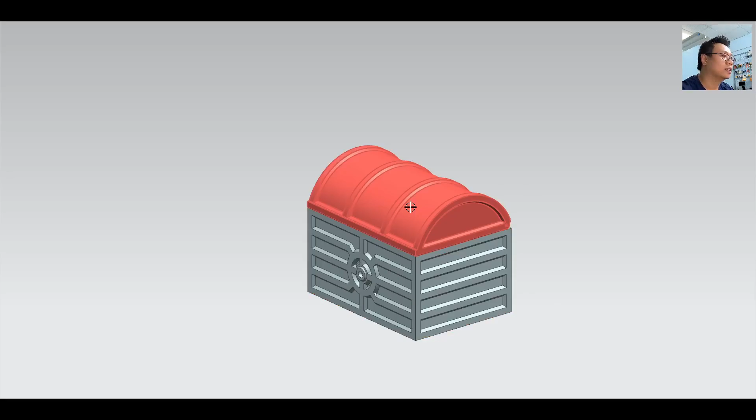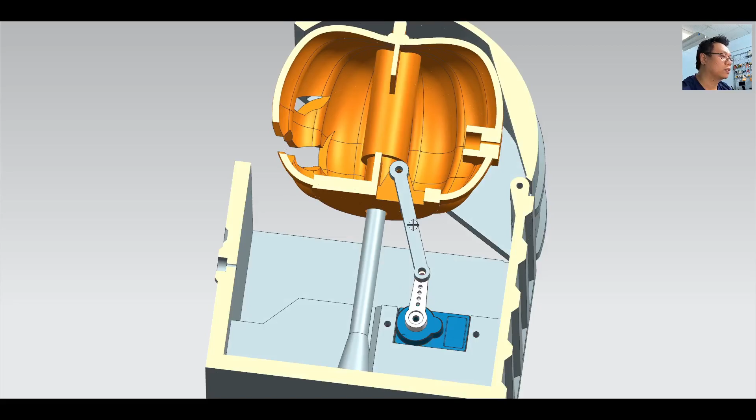Okay, first let's take some minutes to view the 3D design. This photophobia box has the body and a cover on the top. Inside the box, we have a Halloween pumpkin which will slide up and down based on the cylinder guide here, by an SG90 servo and a connecting link.

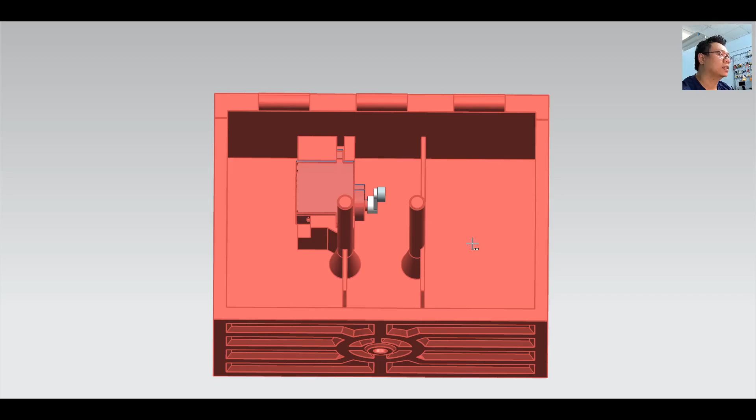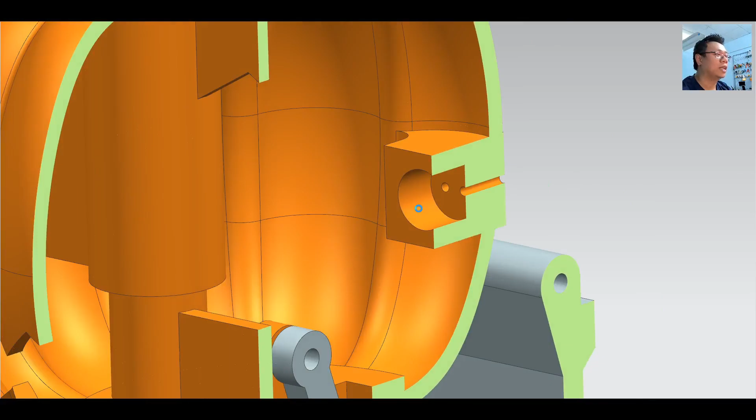Okay, inside the box we have a left pocket for Arduino, a right pocket for 2 pieces of 18650 lithium battery, and in the front of the body we have a hole to mount the photoresistor, and inside of the pumpkin, we have a hole for a 5mm LED. Okay. And here is the moving simulation. Okay, now let's bring components.

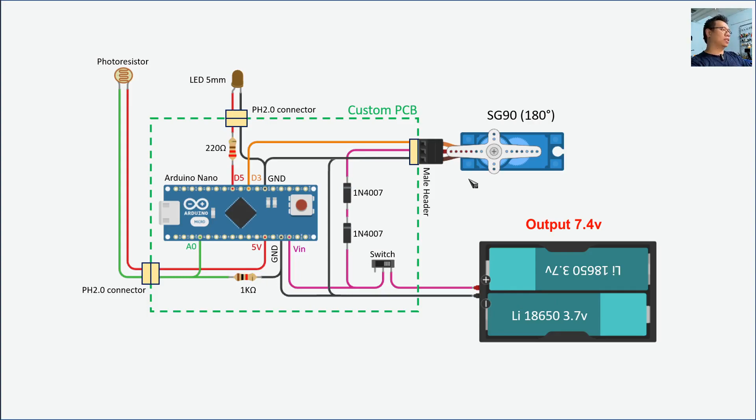But the total output of the battery pack here is 7.4 volt, but the working range of the servomotor is about from 4.8 volt to 6.0 volt, and that's why I use two diodes in series here. One diode will reduce 0.7 volt, and we have here a total dropout of about 1.4 volt, and then we have only 6 volt to go through the line to the servo motor.

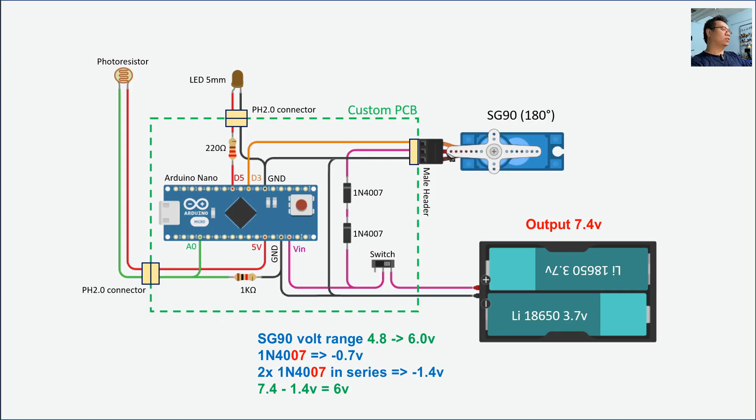Okay, next, this photoresistor is used as a sensor to sense the change of light strength. This is connected to the A0 pin and has a pull-down resistor of 1 kilo ohm here. The last thing is the 5 millimeter LED. It is connected to digital pin 5 through a resistor of 220 ohm. Digital pin 3 is the control channel for the servo motor. Both digital 3 and digital 5 can generate PWM output. Okay.

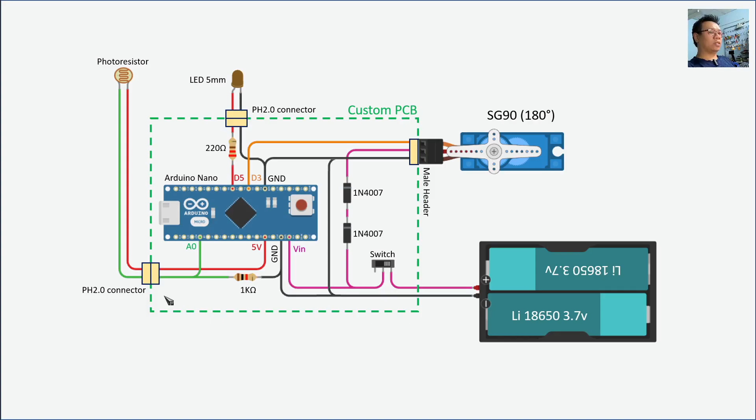Other components inside the green box here I will solder together on a custom PCB board and connect to other components through this connector here. Okay.

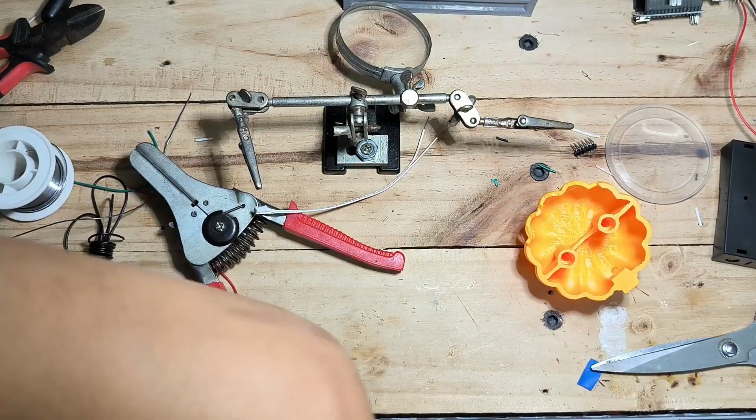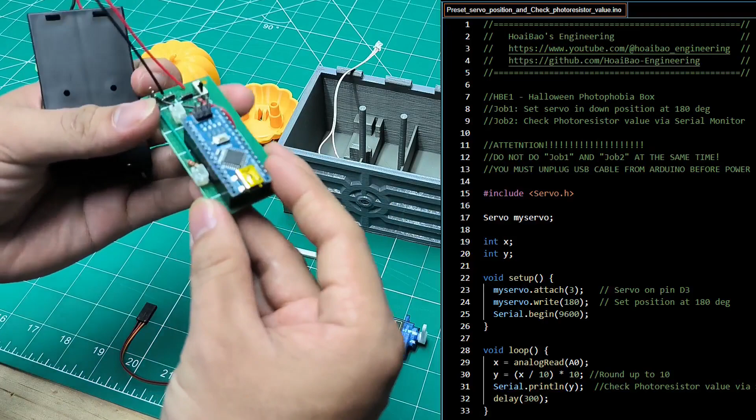Okay, all components are now ready here. First, we have to upload the preset program to this Arduino. It has to preset the right position for the servo motor, and also we have to check the value of the photoresistor.

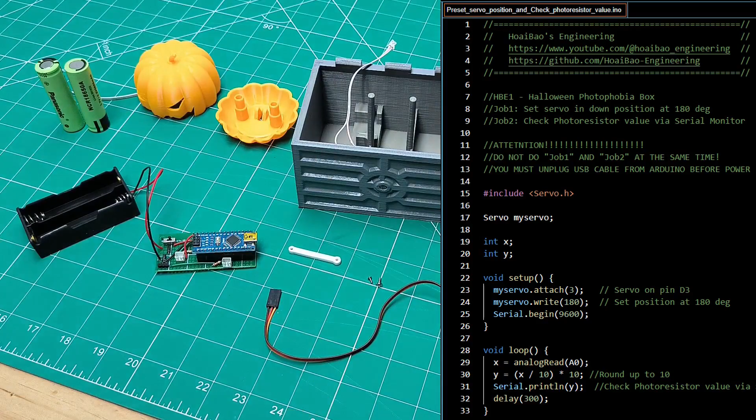Okay, I have uploaded the preset program here. It will turn the servo motor to the 180 degree position, and this position is when the pumpkin hits the bottom and the cover cap is closed. So we will set the right position for the servo arm.

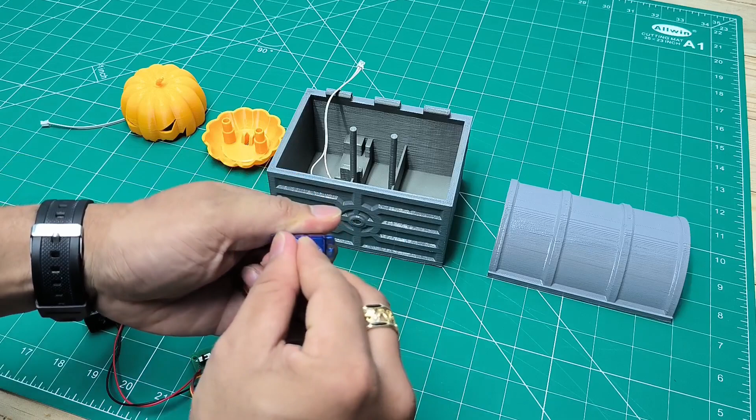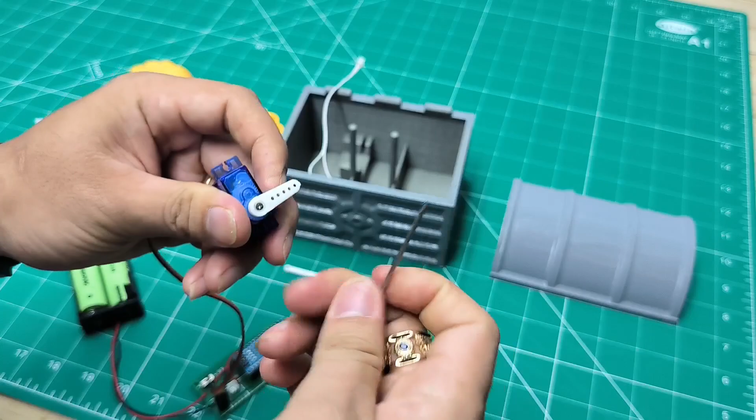Okay, now we must remove the arm, rotate to the down position, like this. Okay. And screw it. Okay, next we will mount the connecting rod to the servo arm.

And then mount the servo to the position here, the pocket for the servo. Okay. I will use a piece of filament here to lock the servo. And then cut off the excess on the end.

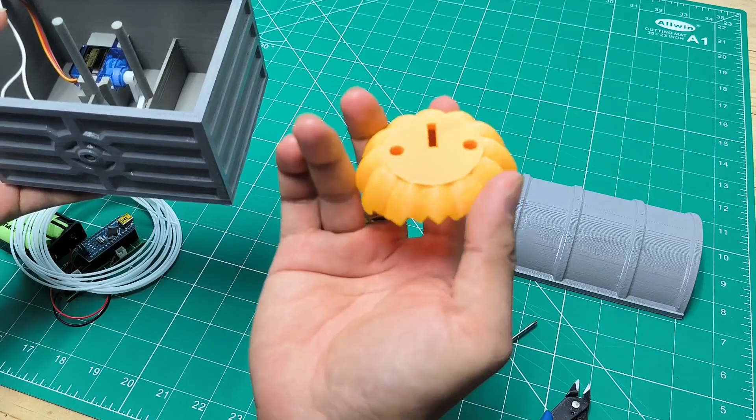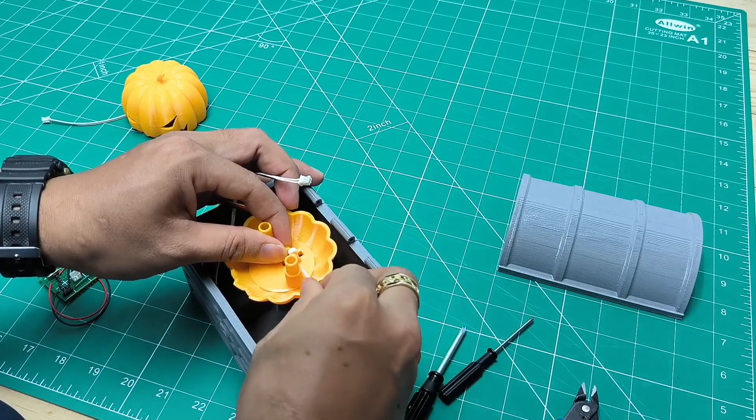Okay, now I will mount the bottom half of the pumpkin. Yeah, one piece of filament. I prefer this way for the small connection. Very simple. Now we will mount the cover.

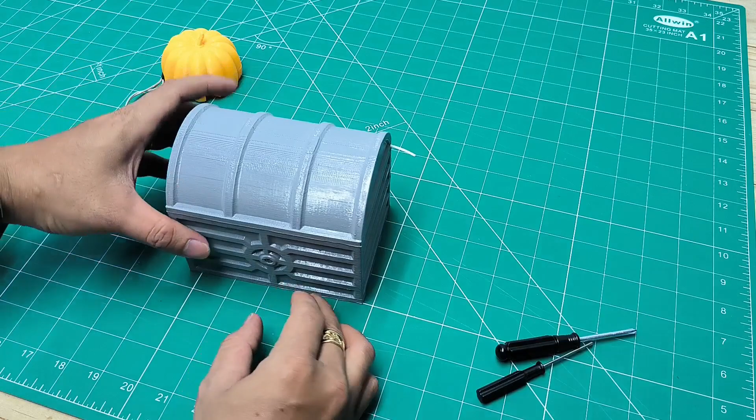Okay, now we will check the value of this photoresistor.

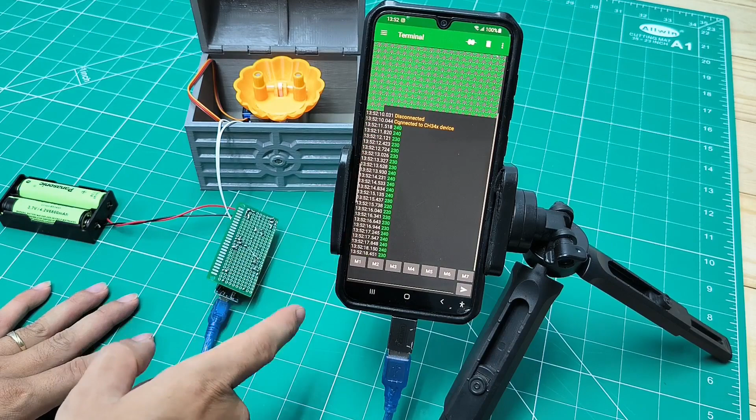Okay, now we will check the value here and then select the maximum and minimum. If the current value is higher than the maximum value, the box will totally close. And if the current value is less than the minimum value, it will totally open. If the current value is inside the range from minimum to maximum, it will open variably. Okay.

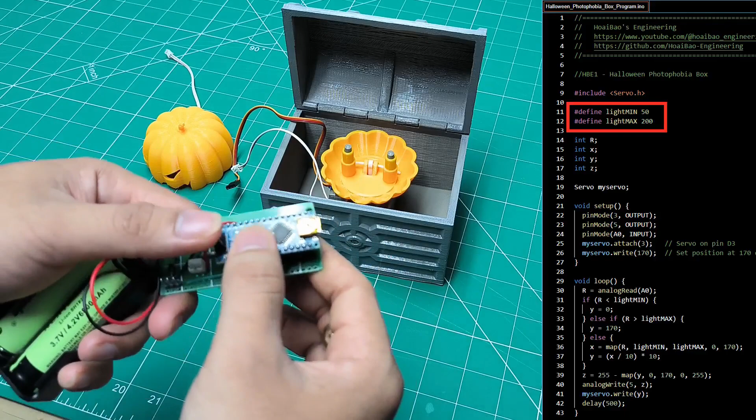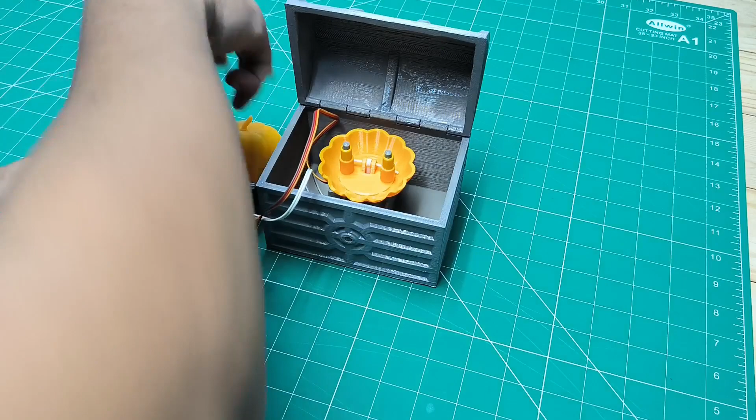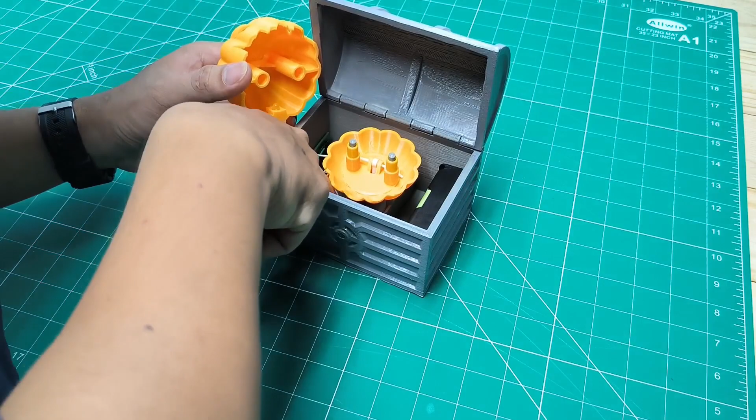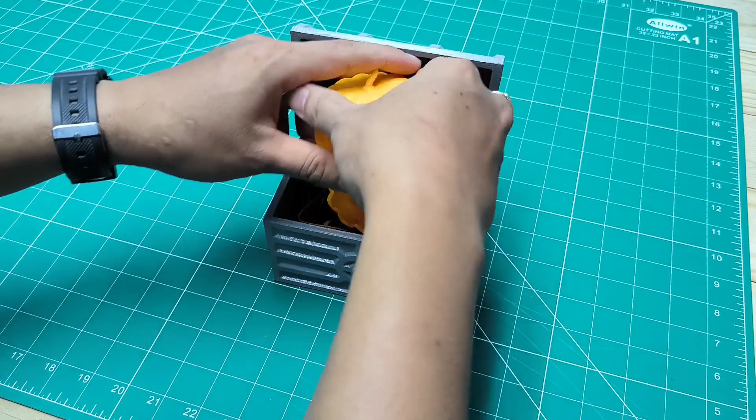I have uploaded the final program for this Arduino with the maximum value of the photoresistor at 200 and the minimum at 50, based on the light condition in my room now. Okay. Okay, let's do the test.